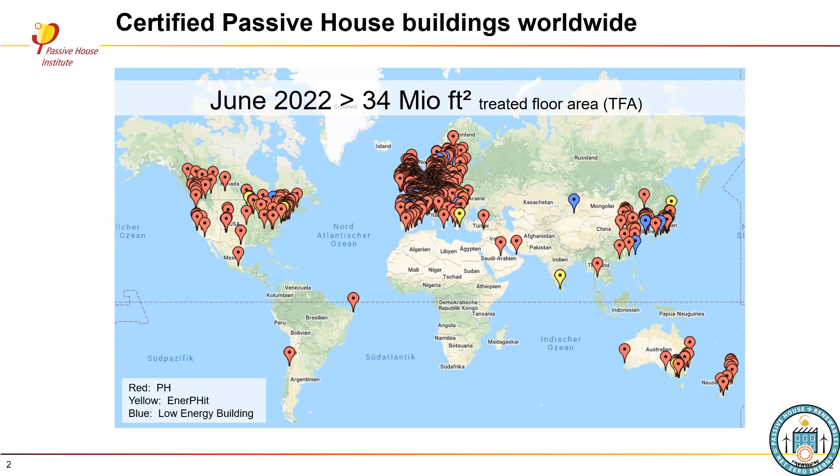But not only multifamily—if I can go to the next slide—they're also doing some office buildings. So it's generally a very positive vibe and uptake of Passive House.

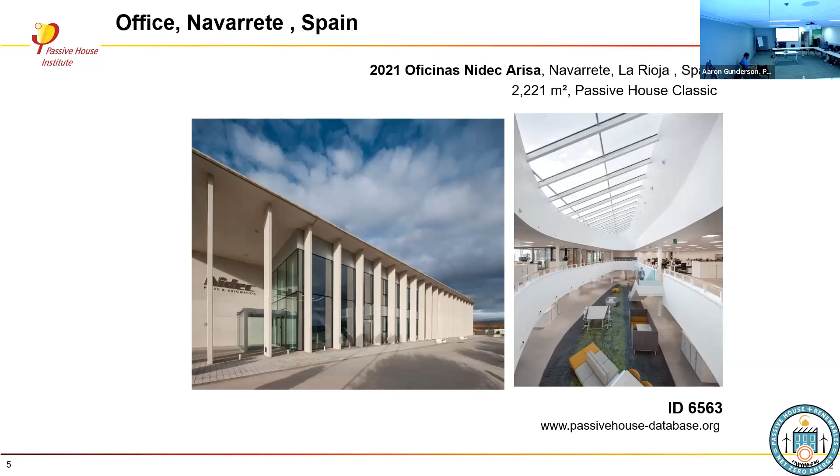As I go through the slides, I've added the link down here. There's an international database where we show Passive House projects, passivehouse-database.org, with the representative ID number. If you want to browse projects worldwide, go to that website and click your way through for inspiration. I've just picked out a few that stood out from fairly recent projects, these are all from 2021 or 2022.

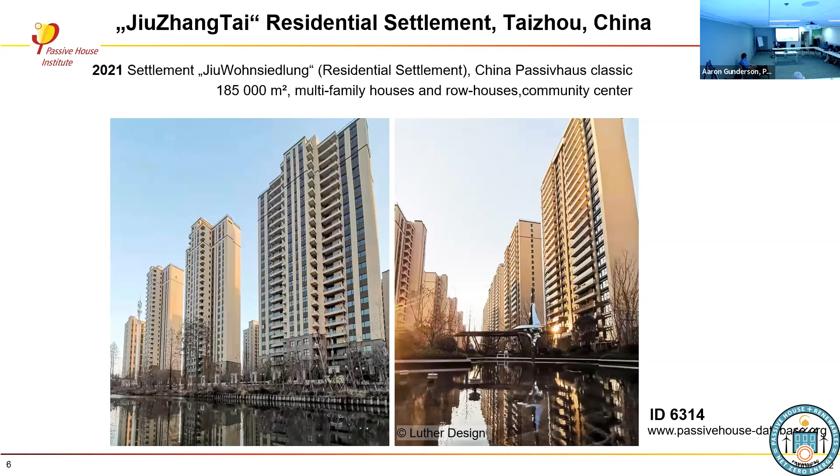This is a quick insight into what's happening on the other side of the world, in China. Passive House in China picked up a few years ago, and as it is in China, things are very big. The Passive House projects being built there are often inside districts, a mix of single family, multifamily, and high rises. These pictures are from a district being built to the Passive House standard in China, which is interesting also because it has many different climate zones—hot and humid conditions, but also very cold conditions depending on where you are in the country.

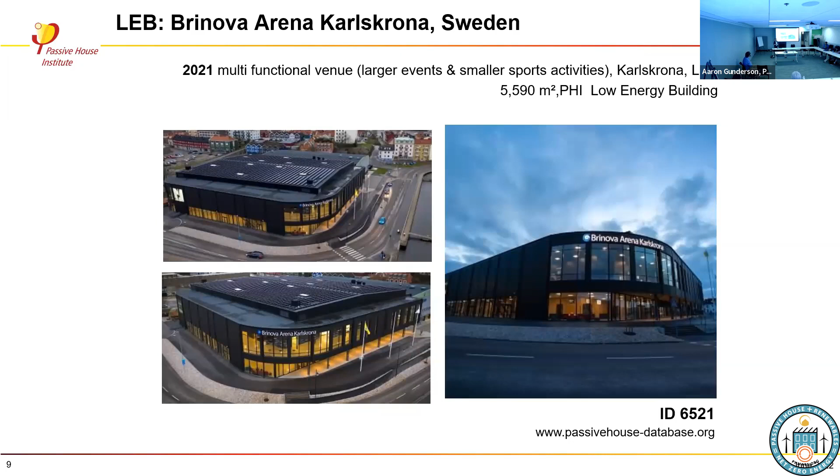This is a project in Sweden, a cold country, and what's interesting is that it's an unusual typology—a mixed-use, multifunctional building with larger events but also small sports activities. This one is not actually a certified passive house, it's a certified low energy building, so it has slightly higher energy performance values but has gone through the same quality assurance process as Passive House.

Another retrofit project, this one is in Spain, in Barcelona, from Micheel Wassouf, who's a very active and long-term passive house designer in Spain. What's special about this is that it's a phased retrofit. It wasn't all done in one go, but over the course of many years. They're taking it phase by phase, and we have a pre-certification retrofit plan, so you have to plan ahead, and you can pre-certify for the retrofit standard.

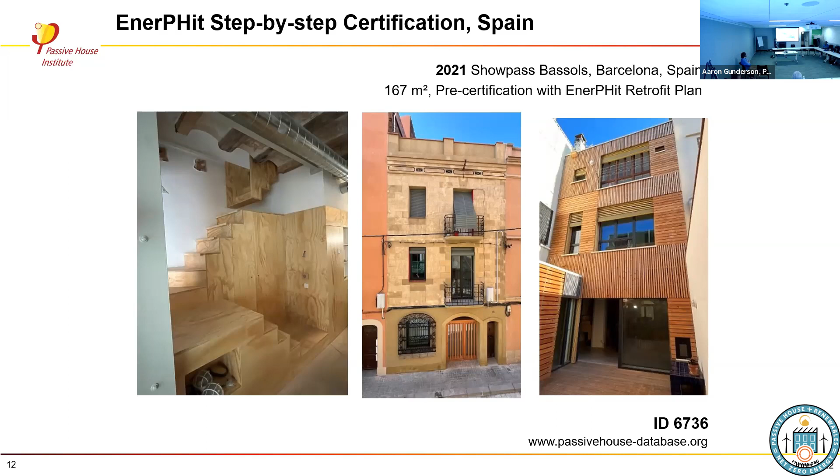Another very special typology is Passive House swimming pools. We started off with research on what does that mean. Obviously for a pool, you don't use the usual metrics, it's kind of the whole house approach. How do I apply energy efficiency for such complex projects?

We started off the research in 2009, 2010. There were two pilot projects in Germany. And then the latest project, which is now open and about to complete certification, is St Sidwell's Point, a leisure centre in Exeter in the UK. It's a great way of seeing how Passive House can be applied as a concept and as a standard for different typologies and complex typologies.

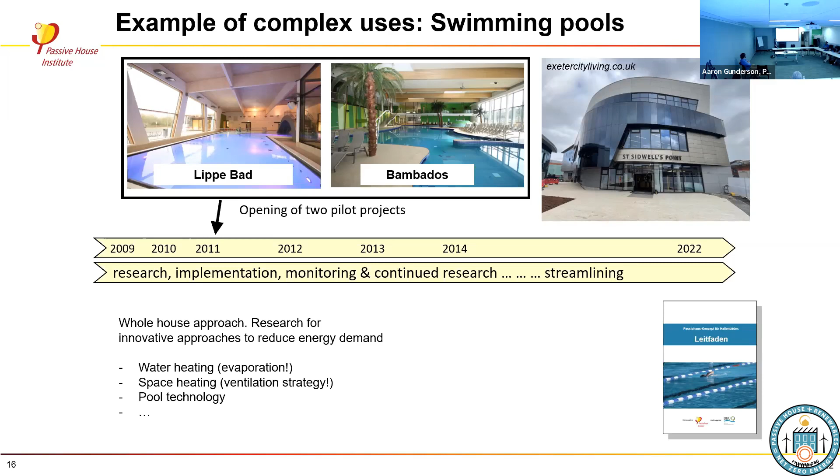So that was just a few pictures and typologies to give you an insight of what's happening around the world. This is similar statistics to what I showed you earlier in terms of where we are in the world. On the right-hand side, you can see the growth of the very first passive house, to where we were at the end of 2021, divided by the different regions. Obviously, the international passive house standard is still largest in terms of square footage in Europe. The next is Asia, with China being extremely dominant, and then there's North America.

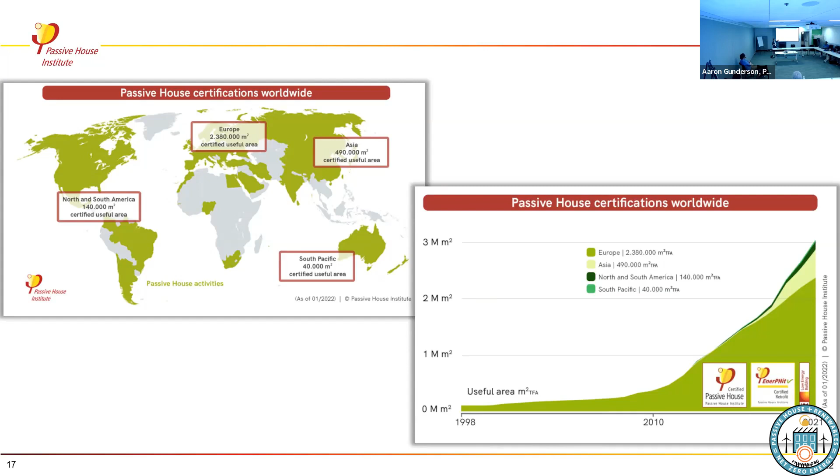Looking at these numbers in North America in comparison, they look quite small. But what's really fascinating is if you keep an eye out on what's happening right now here in North America, that's about to explode pretty drastically. So again, just a few pictures to see where we're heading, but it's certainly growing, and a lot of the projects here in North America are large, quite big in terms of the square footage they're covering.

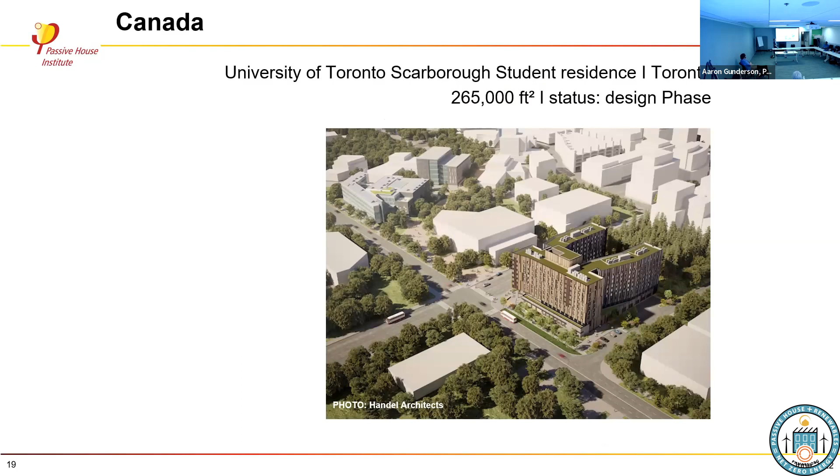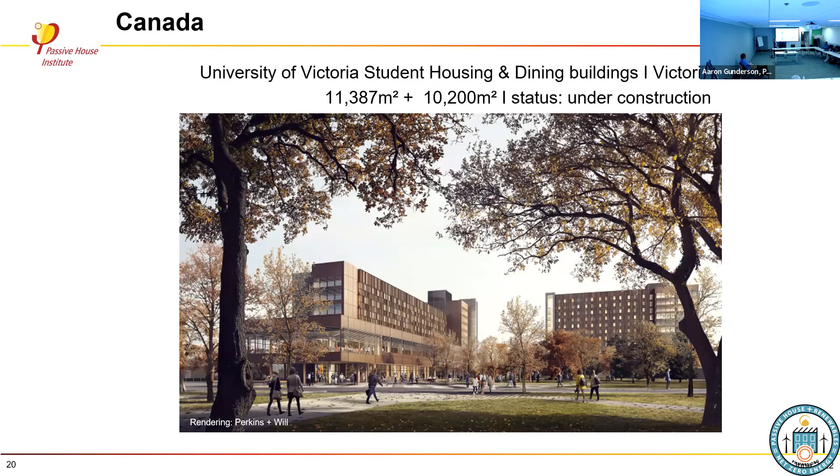So University of Toronto, for example, has a student residence, University of Victoria has student housing with commercial kitchens, which is also a very interesting passive house approach. There's a fire hall in the city of Vancouver undergoing certification. And there's a tower project, the Nelson Tower, also being planned and aiming for certification in Vancouver.

And then obviously here in the US as well, there's quite a lot happening in New York. This is the Sendero Verde project. This small part is about to be certified, and these other sections are also aiming for certification, still under construction. So very exciting to see all of these projects finally actually coming online and showing up in the statistics, being complete and being there as kind of pioneering pilot projects.

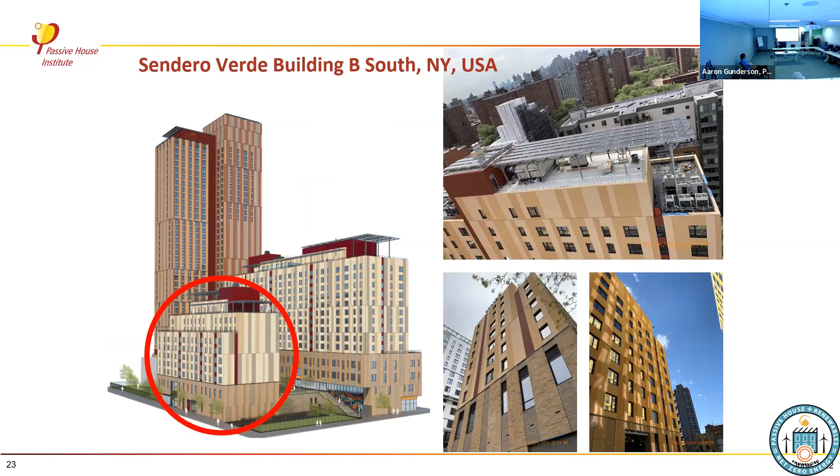And I really hope for that same ripple effect that we have seen in Exeter and so many other pioneering projects.

Another really important one, or interesting one, is the Pirelli building. That's a retrofit, a large-scale retrofit project, also on the radar here in the US, in New Haven, which is being reused, turned into a hotel.

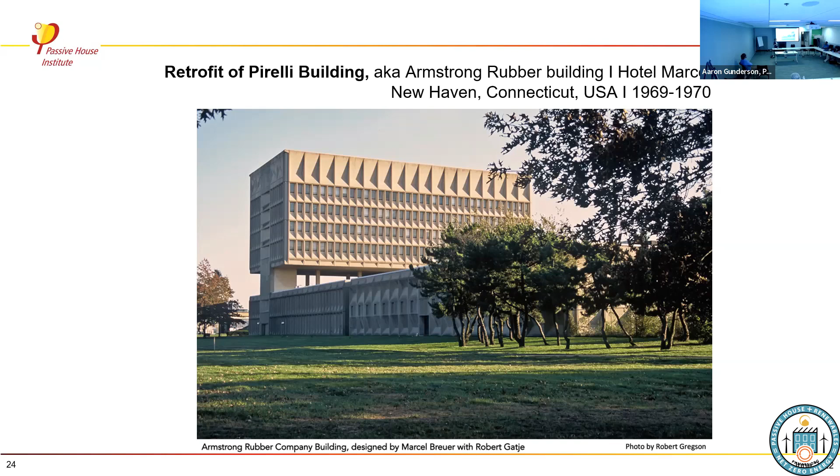And then, of course, here in Boston, the largest project happening right here, right now, is the Winthrop Center, which is also aiming for passive house. It's very special, a pilot project, and it's unique, A, because of its dimension and size, and B, because only part of it, the office part, is being certified. So we're very excited about this coming online as well.

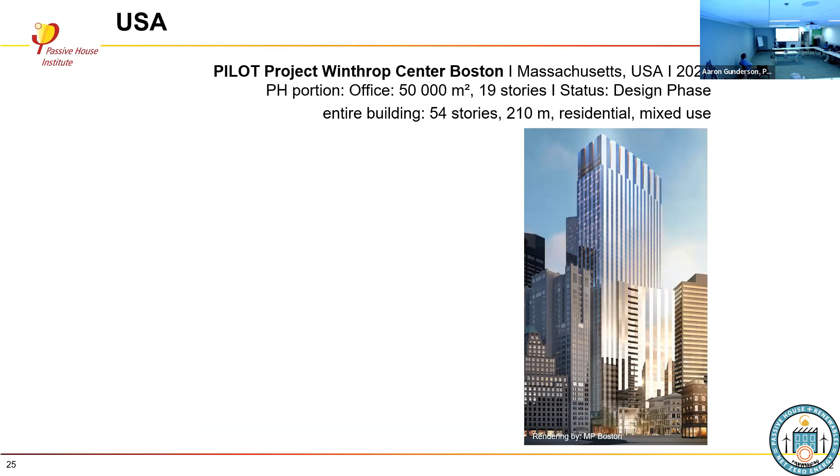Okay, so much for an insight into projects. Now speaking a little bit about PHI, the Passive House Institute, and what we do, what our areas of work are.

So yes, I've come from Germany. We are based in Germany. We have two offices, one in Germany and one in Austria. We were founded originally in 1996, really as a research institute to bridge the gap between research, technical knowledge, and practitioners. So to see where we're trying to get, what is possible from a research perspective, and how do we give that knowledge to practitioners so it gets implemented and actually impacts the way buildings are being built.

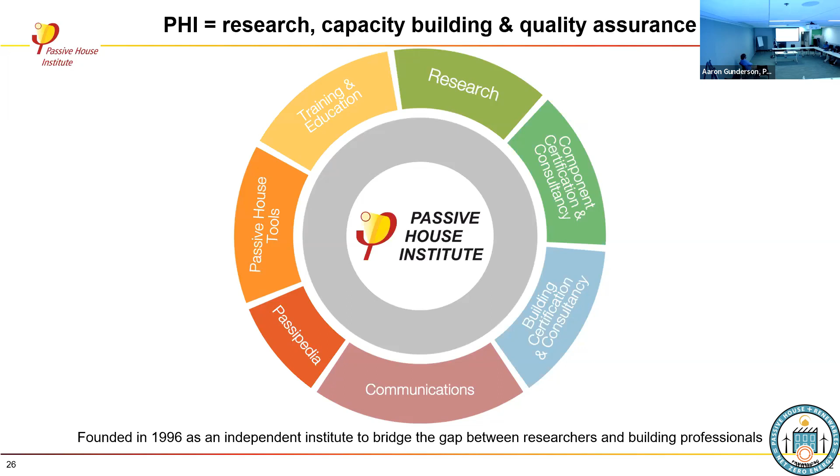So we're all about quality assurance. We're all about safeguarding the standard, defining the standard, and then providing quality measures and support for uptake. That's basically what we do. We're based in Darmstadt, Germany, and we work with partners internationally who help to advocate and spread the passive house knowledge in their specific regions. I'll come to that a little bit later.

So reflecting briefly on the different programs we have, obviously the passive house standard as defined is our guardrail, that's what we're aiming for. By now we have these different programs, so it's not just passive house, passive house - we now have these different levels of certification. In the top row, you see passive house for new builds, where we have Passive House Classic, Passive House Plus, and Passive House Premium, so three different tiers.

Similarly, for the retrofit, we have a separate retrofit standard - I'll explain it in my next slides. And here again we have the different tiers: EnerPHit Classic, EnerPHit Plus, and EnerPHit Premium.

Now, the difference between these different tiers, from Classic to Premium, is that Classic has remained with the passive house baseline, which is focused on energy efficiency. So it's really looking at the fabric performance, achieving your heating and cooling energy targets, but not looking at any kind of energy supply or renewable energy supply. Whereas the Plus and the Premium, you get awarded if you have renewable energy production, whether on-site or off-site, as long as it's new renewable energy production - that gets you Plus, or if you have even more, then it's the Premium standard. The Plus and Premium also have a slightly more stringent overall primary energy target, so it's more ambitious going to Plus and Premium, and we're trying to encourage people to go the extra mile and not only focus on energy efficiency, but also include renewable energy generation.

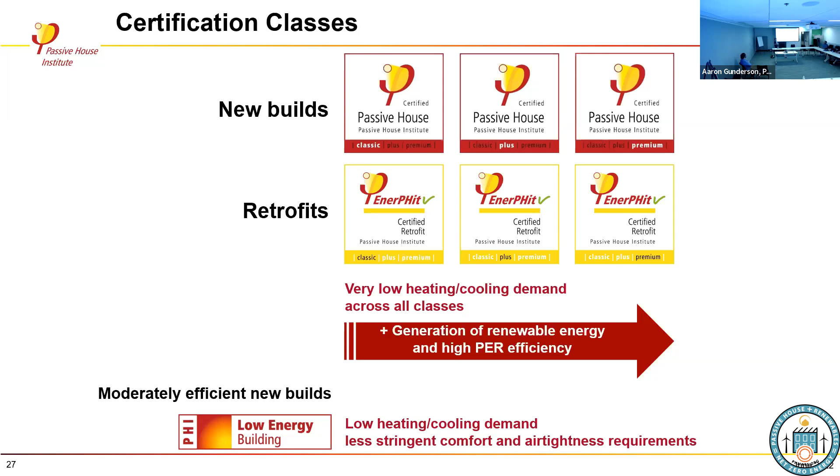And it seems kind of harsh to say it's a complete hit or miss when you're on that 4.75 for your heating. But we wanted to award projects, especially in new places, in challenging climates, with a challenging setting, to still get some kind of award and recognition of having gone through that quality assurance process. So that's why we introduced this PHI Low Energy Building Standard.

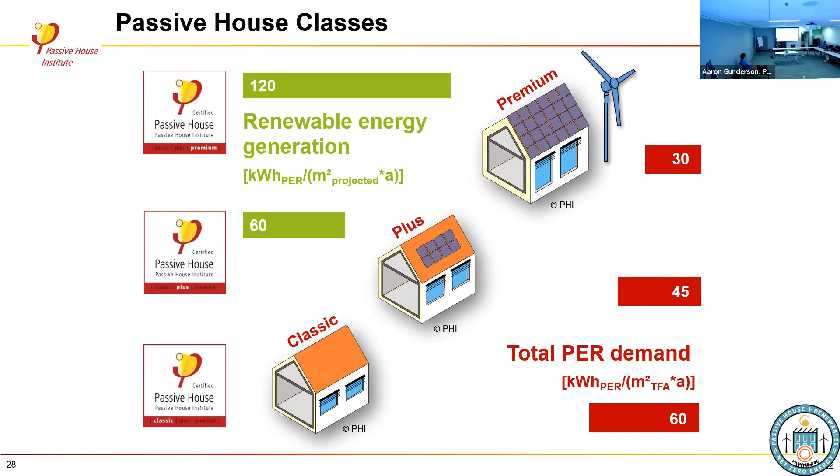We did that deliberately in terms of, it is an alternative, it's a different approach to the net zero, which is commonly referred to or kind of often used by others. And the reason for this, to have the independent rating of energy efficiency and renewable energy supply, is basically...

that we don't want to penalize any kind of commercial, tall, shaded or urban infill projects. So this kind of project in a net zero scenario doesn't stand a chance, just because the space at the top for your PV is so small in comparison to your treated floor area. And that doesn't seem fair. And it guides people to build kind of single-family houses spread out, and that doesn't seem a very sensible design incentive.

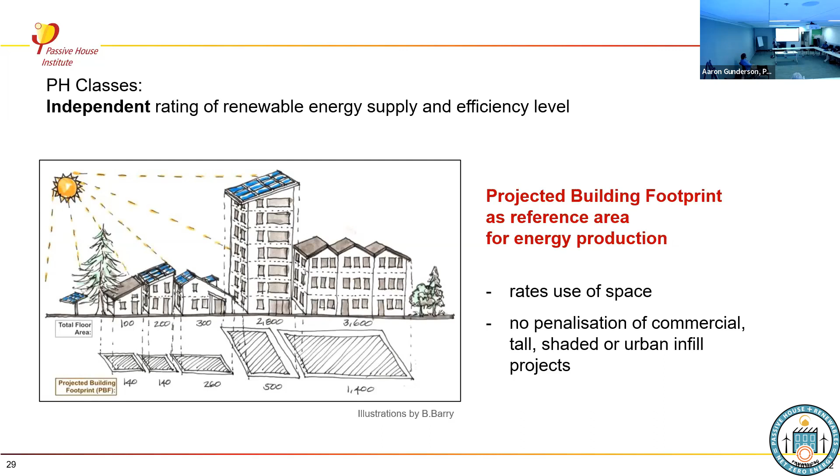So instead of pushing people for net zero, which can be very, very misleading, we have this independent rating of energy supply and energy demand. So we just say, okay, your building occupies a certain amount of space, and it makes sense to use that space as efficiently as possible for renewable energy production. And that's how we rate renewable energy supply. That's why it's per projected footprint. Okay.

Now, in my previous slides, I used the term renewable primary energy, or PER, quite a lot without actually explaining it. This is also something that is very specific to the International Passive House Standard. We introduced it in 2015 for the first time, when we introduced the different passive house classes. And we introduced it as a different metric and alternative to the standard source energy approach.

Just because we are in the position worldwide, the energy supply is transitioning towards renewable energy infrastructure, towards electrification. And what we need to be addressing as a building industry is to make sure that buildings are designed in a way that they will work and they support that renewable energy infrastructure. Now, the difference with renewable energies is that they're not available at all times, right? It's only when the sun shines, or when we have wind, or when we have hydropower. So it's really important to look at those aspects of load matching.

So what we did basically for the PER concept, it considers your building in the context of a scenario of 100% renewable energy supply. And then we have conversion factors to see, okay, how much renewable energy do I have to feed into the grid in order to be able to cover my site energy, the actual building energy demand. And that loss factor, that conversion factor, takes into account the load mismatch. So it takes into account how much losses do I have along the way because of storage, because of seasonal storage. And that can be quite significant.

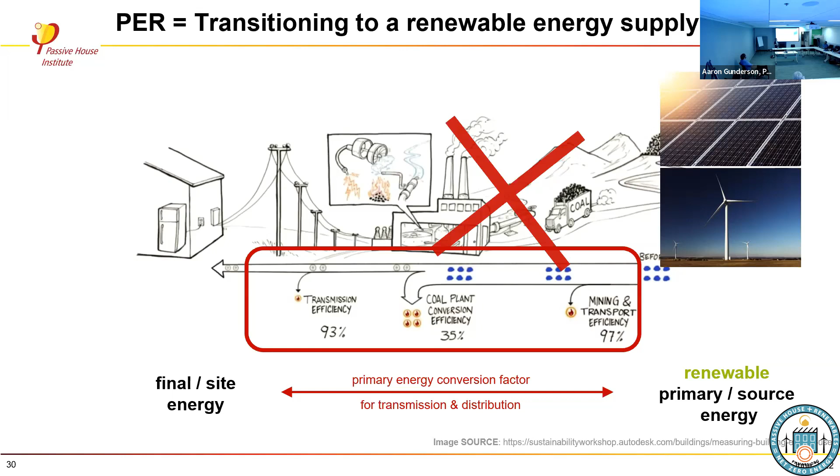It's a big topic, PER, which I can't dive into in detail right now. I'm happy to talk about it later, or point you toward resources to read more. It's important to me since it's one of my research topics, but we've also seen really interesting feedback from the passive house community and from policy makers looking for these kinds of design incentives. What does it mean to have buildings in the context of renewables?

Basically, it's a climate-specific decarbonization metric based on efficient use of regional renewable energy resources. If you apply it to your design, it strongly incentivizes electrification instead of using fossil fuels. So with passive house planning, you'll get a better PER factor with a heat pump electrical solution than with a gas boiler, which is the direction we're all trying to push toward.

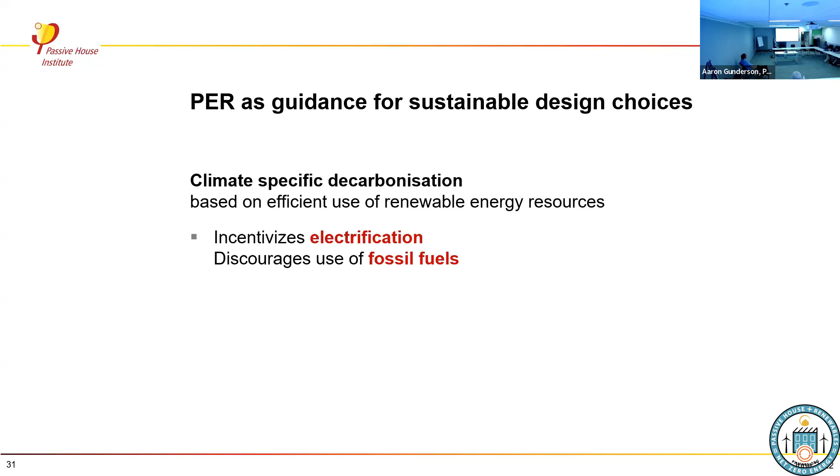It also means it aligns energy demand with renewable energy supply. The difference for heating and cooling matters—it's much more important that we reduce energy demand for heating than for cooling, and that's what the PER concept picks up on.

Last but not least, we have a budgeted approach to biomass. It's not so relevant here in North America, but it's a topic in many parts of Europe, where projects get rated as very green and sustainable just because they have a wood burner, even if the building itself is inefficient—that's not a long-term sustainable solution. So we have a budgeted approach: some biomass is fine, but not to heat an inefficient building.

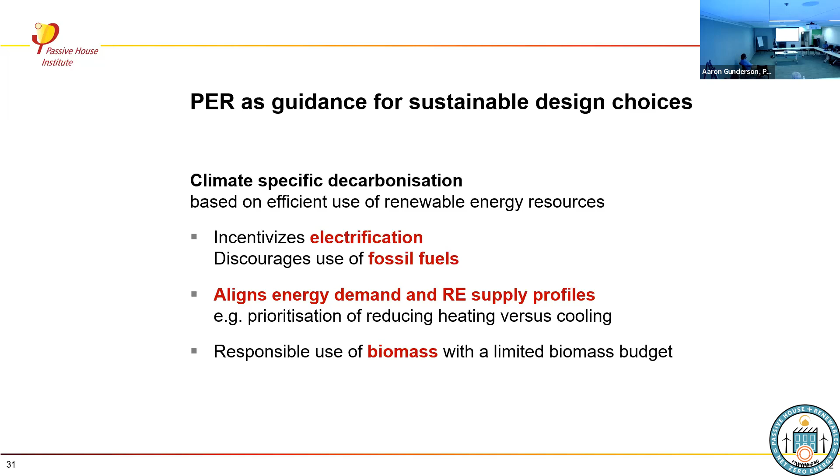So that was a quick run-through of PER. I do want to speak a bit more about our retrofit standard, EnerPHit, because that's just starting to pick up here in North America, though I don't think there's much activity yet here in Massachusetts.

It's called the EnerPHit standard. It's a retrofit standard where the idea is you apply the same concept—implementing passive house components—to an existing building. There are two pathways to achieving EnerPHit certification. One is the component pathway, where you have to meet specific minimum requirements for components like insulation, windows, and airtightness.

Pathway two has specific energy demand limits, and those limits are higher than for a passive house, recognizing that with an existing building it can be more difficult—you have thermal bridges, especially in the ground area, that you can't fully resolve like in new construction, plus orientation constraints and so on. So the threshold is slightly higher.

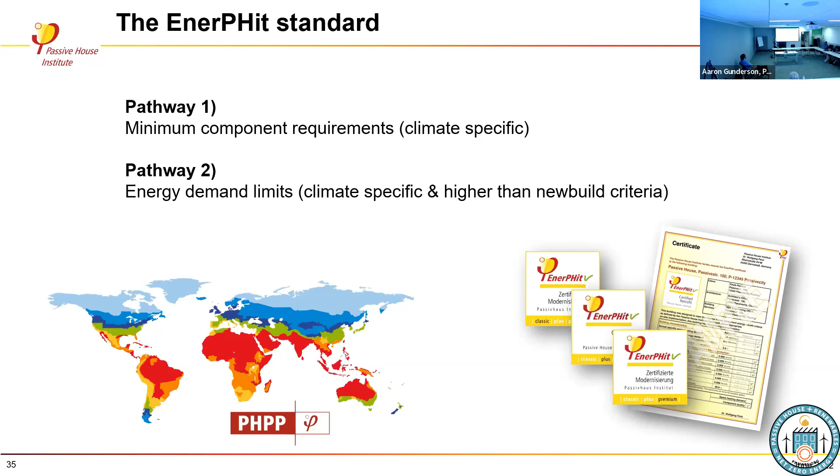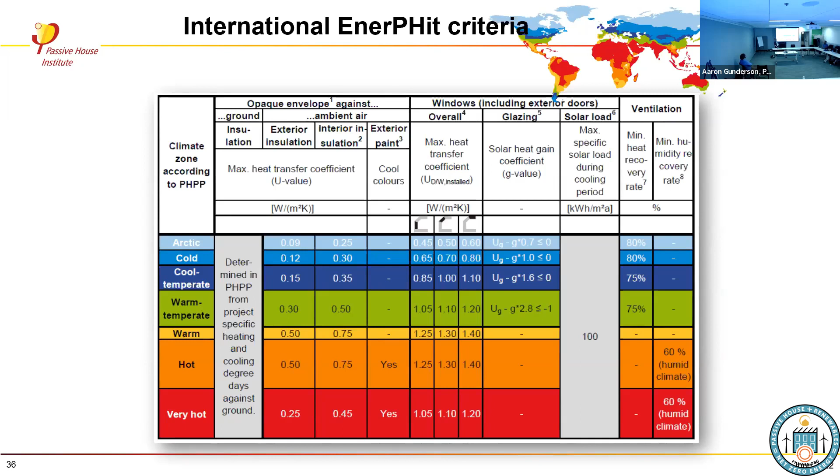Both pathways are differentiated depending on where you are in the world—they're climate specific, with slightly different targets for different climate regions. This slide uses SI units just to give you an idea; the actual numbers can be looked up on our website. Basically, we define the U-values or R-values for windows and walls, and the efficiency of heat recovery requirements for different climate zones, whether you go the component pathway or the energy demand pathway, with different targets. Cool temperate is what we typically have in Germany.

For passive house, it's 15 kilowatt hours per square meter per year. And for EnerPHit, it's 25 kilowatt hours per square meter per year. So not quite double, but it is a bit higher.

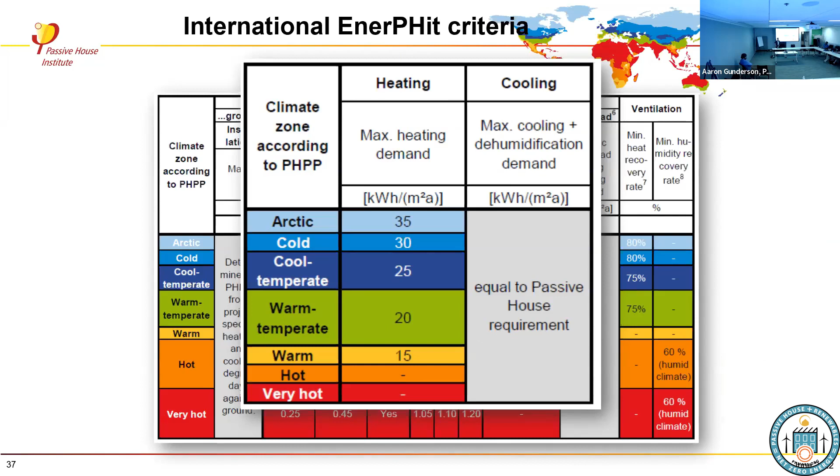Retrofit is something we're really trying to promote and push more, because it's important. We now have one additional scheme to address projects that can't do a full retrofit all at once, but need a phased approach—maybe you only replace the windows because they need replacing, but don't have the means to address insulation at the same time, or vice versa: maybe your windows are still in good condition, so you do the insulation first and leave the windows.

So that phased approach - now the difficulty with those phased approaches, and what often happens, is that we create a so-called lock-in effect, because people will look at the wall insulation without thinking ahead in terms of what does that mean if I replace my windows later on, without looking at the details beforehand.

So what we offer is the so-called EnerPHit retrofit plan, which is an extra tool that aids you in documenting what is my timeline for my different components, and what do I have to keep in mind. If I do my walls first, what does that mean in terms of connection details, or the other way around.

So we offer this retrofit plan, and you can get pre-certification. If you've set out this entire plan and implemented the first step, you can submit that to PHI or to an accredited certifier, and get pre-certification to acknowledge that you're on the right track towards achieving EnerPHit certification in the end.

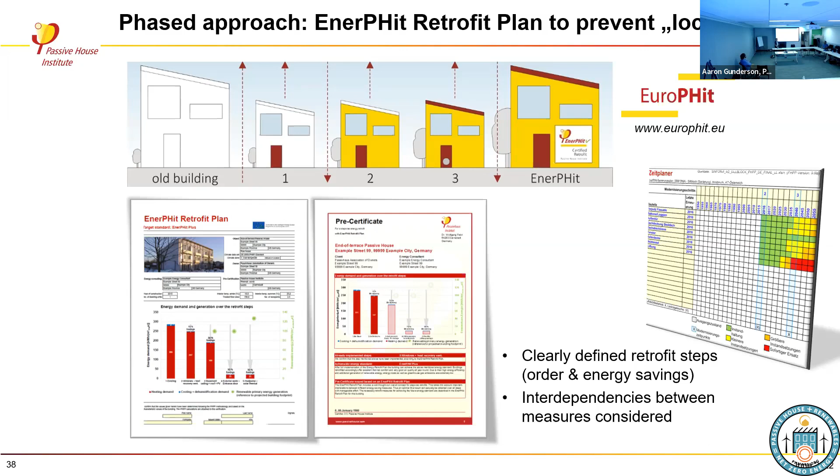And I'm personally really excited that this is starting to pick up. It was really difficult to get this rolled out, but it is starting to pick up, especially in Austria. So this is really, really exciting. It's worth looking this up again.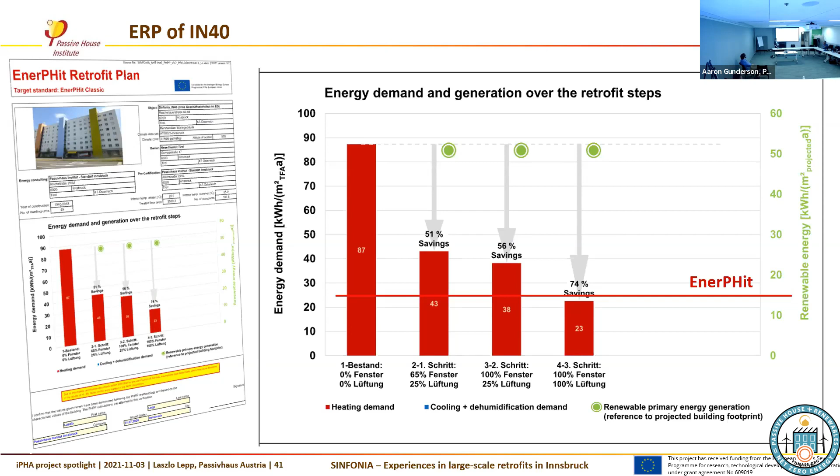Just some pictures to show that this is reality and not just on paper. This is what the project looked like beforehand, what it looks like afterwards.

They have some really interesting details here in terms of how they dealt with the balconies. On the other side of the building is full of balconies, so it's really interesting to look at that thermal bridge details.

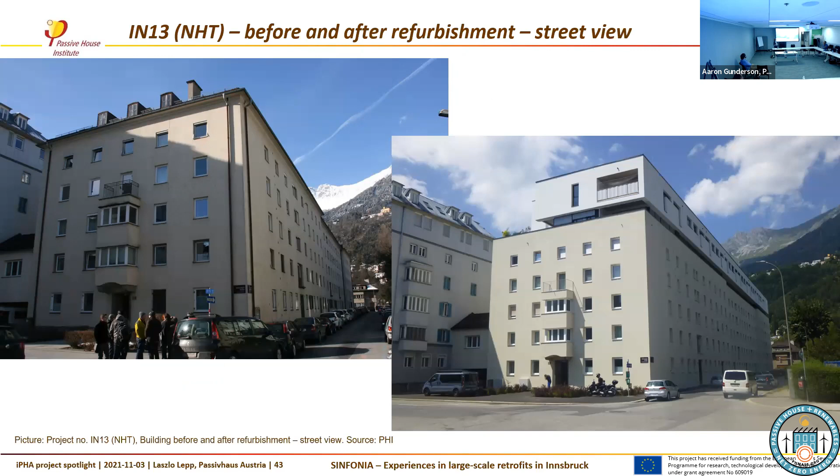Here are some details of how they dealt with the ventilation. Most of these projects also retrofitted while the people were still living in them, so they had to find a way to do this with as little disruption as possible.

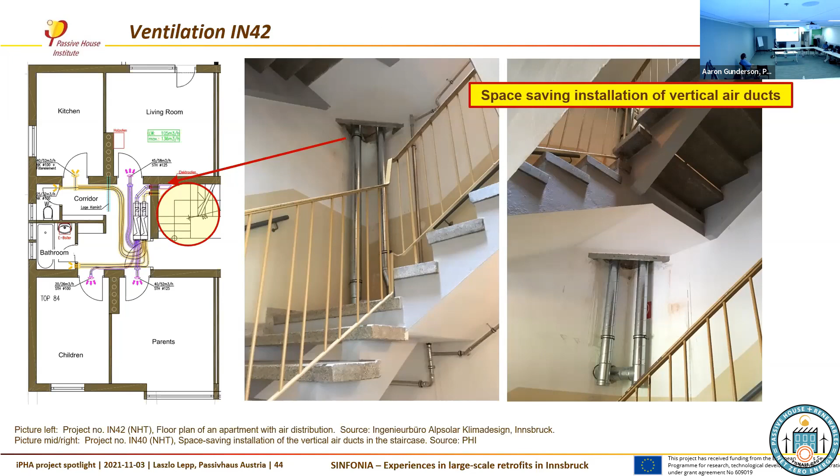Again, here, this is the ventilation within the apartments themselves, so installing the ventilation system in the hall, and they did it pretty quickly. So it was important to the developer, in this case, to have smooth implementation.

So just a brief insight into this. If you'd like to learn more about it, I'm happy to point you in the direction of the resources. The webinar should be going online also, at least for members - these kind of webinars are available to access and to rewatch.

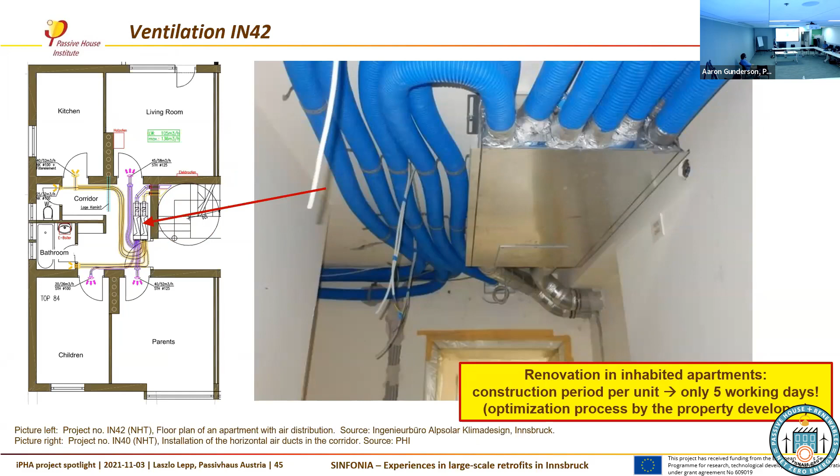On another topic of retrofit, this is something that is ongoing at PHI - some of our current research work. It's called the outPHit project. A lot of our research work happens or is enabled through funding from the European Union. This is one of those projects, outPHit, where we as Passive House Institute have the lead, and we work with partners in different countries of the EU to further the research and implement this in pilot projects.

And the goal of this outPHit is really exciting, really up to date and really important. It's about lowering the barriers of uptake of really high energy efficiency solutions for retrofit - essentially one-stop shop solutions, prefabrication, and being able to distribute that on a larger scale, with the aim of being able to implement the EnerPHit standard on a large scale. That's the goal of outPHit.

We're still in the middle of the project. Some case studies were presented in the virtual part of the conference last Friday, so some of you might have seen it.

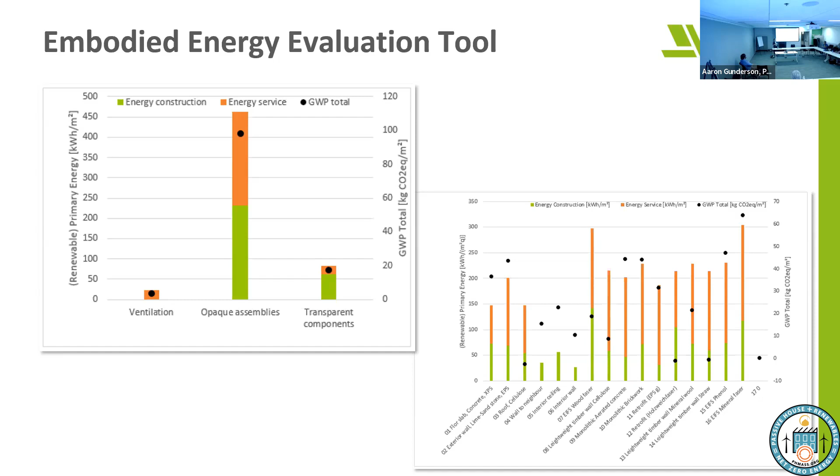It's quite interesting to go into the results, because it does show that it's worth investing in extra insulation compared to the operational energy savings over the lifetime of the building, especially for retrofit. It really does make sense. And it's quite interesting to see the comparison of different materials - not always intuitive, so very, very interesting.

Okay, so for the last section of my presentation, if I still have a moment, Aaron - is that okay? I wanted to touch a little bit on those three focus areas.

It's basically the design tools that we need, the people and the expertise, and the components and their quality. Those are really the three main ingredients that we as a Passive House community need to be working on, pushing, distributing, and making available in order to make sure that passive houses being built reliably achieve high performance.

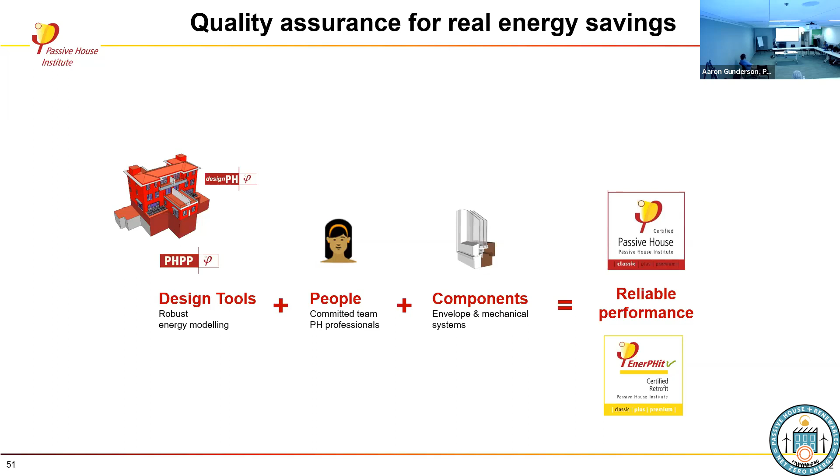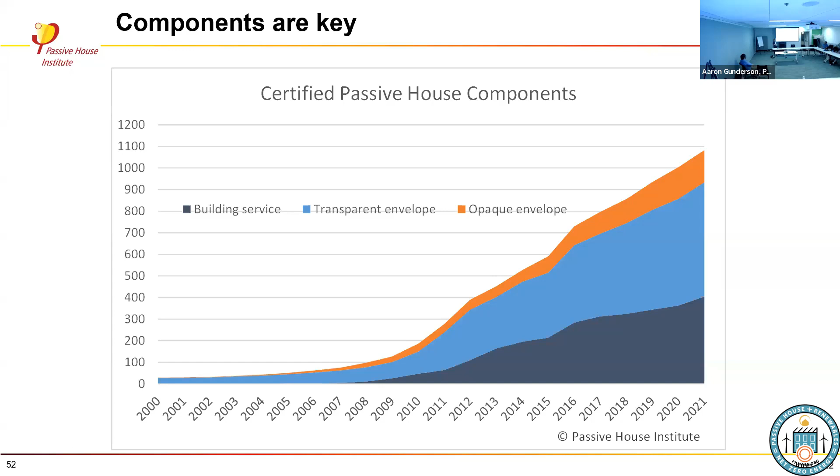So I just briefly want to speak about these three categories. Passive House components - we from the Passive House Institute run a certification scheme. We work with manufacturers, help them optimize products, or if they already have good products, we offer certification. Here you see the growth of Passive House component certification over the years. There are different categories for building services, transparent building envelope, or opaque envelope - building systems basically with the details already included.

There's a search function, which makes it easier if you're looking for a specific product, for example. You can sort by country and availability - you can check if a product is available in the US or not. And new, what we started implementing is export to the PHPP. So if you click on a window, you can click a button and get those specifications integrated into your current PHPP energy model. At the moment this is for transparent building envelopes, but we'll implement it for other components step by step.

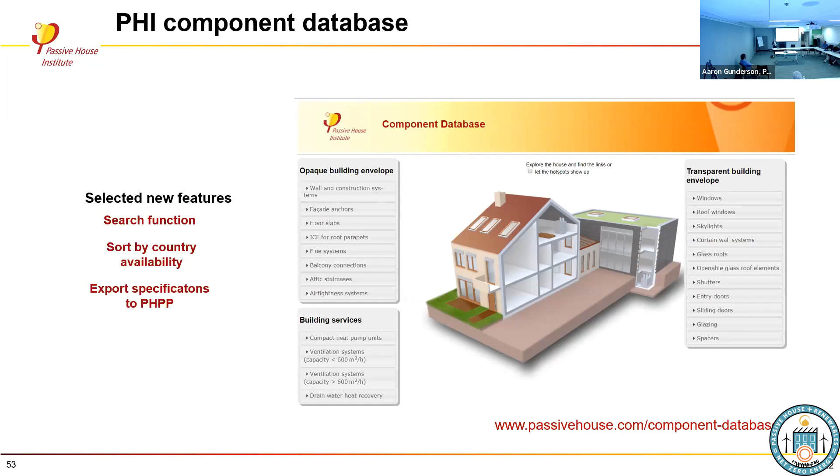What I don't have a slide for, but what's important to note, is that we're trying to push more for certification of heat pump systems. We have a certification scheme for split units for heat pump systems, so we're trying to support that market uptake. It's a really difficult one to assess the efficiency of such systems, but we're happy to work with manufacturers and really want to move that forward.

Then the people - all of you and beyond. Passive House training is super, super important for spreading the knowledge and driving change. We need to make sure people know what it's all about and how it works in order to implement it.

We're celebrating an anniversary this year - 15 years of the Passive House Designer certification, and 10 years of the Certified Passive House Tradesperson certification. So those are the two main tiers that we have, for designers and consultants, and for tradespeople.

I'll say a bit more about those programs in a little bit. There's another level of expertise which is really important, and that's the Passive House certifier.

People who are really experienced can go through the certification training with us at Passive House Institute, PHI. They can become accredited certifiers and then certify passive houses to the Passive House standard in their region. That really helps us grow Passive House internationally, so projects don't have to come all the way back to us in Germany for that quality check, but can go through accredited individuals in different countries. So that's really helping us grow the movement.

Here in North America, there are around 13 certified organizations, active people, and over 25 individuals. They come together as a group called the North American Certifiers Circle. Passive House Network is also doing some really good work to inform the Passive House community here in North America about what certification is all about, why it's important, and how you can approach a certifier. So that's worthwhile looking out for if you have questions about PHI certification protocols.

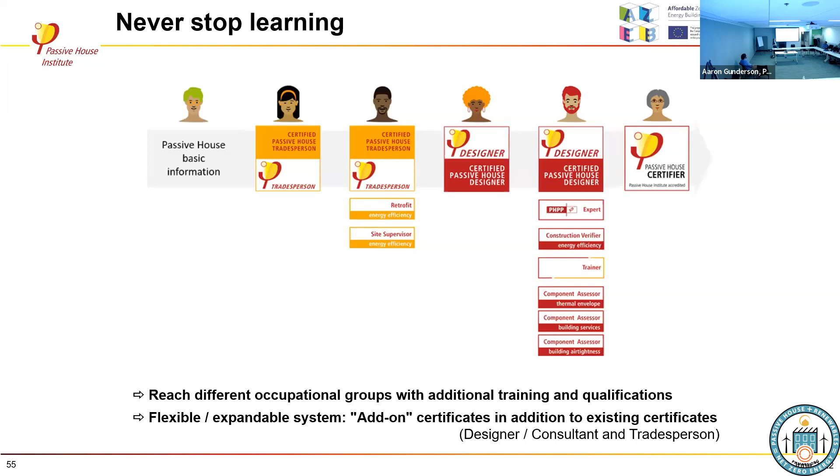Now the tools, a really, really important part of Passive House. We wouldn't be able to achieve Passive House without these verification methods. PHPP has been part of Passive House from the very beginning. It's our energy balance model, what we use to optimize the design, and it's the core of Passive House certification, really verifying where my energy performance is at. We've just released Passive House PHPP version 10 in English last month.

We're setting up contracts with resellers so you can access it here in North America. Not quite ready yet, but soon, just a little more patience. It is available in English, so you'll be able to access it soon, and I'll give you an overview of updates in a second. Next step is to translate it into the IP version, and that'll be within this year. I don't know how many of you work with SI, but if you do, you'll be accessing it sooner. If you want to wait for the IP version, that's a few more months to wait, but we're on it.

So what's new in PHPP 10? I'm only going to briefly run through this, and then I have a workshop on Thursday where we're running into a bit more detail on these different features and what is new within PHPP 10.

There's a few new features, worksheets, and tools. The core of the PHPP in terms of how we calculate heating and cooling hasn't changed. That's the same, that's worked, that didn't need an update. So it's really about adding new features to the tool.

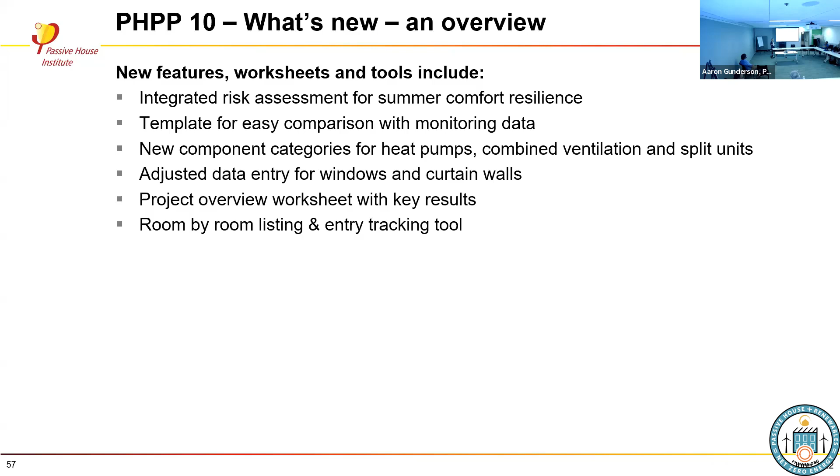And then there's some supplementary tools like a room-by-room schedule where you can easily keep track of the different rooms and different room ventilation rates. So those are the main new features, and then there are a lot of small changes and additions within the different PHPP worksheets.

For you guys, it's not such a big deal. For people in Australia and New Zealand, this is huge. PHPP 10 is going to make a huge difference because it now also works fluently on the Southern Hemisphere. Beforehand, you had to switch the climate data and pretend it was on the Northern Hemisphere. So that's a big change for many people down under.

I don't know how many of you are familiar with the variant calculation. There's a variant worksheet in PHPP which lets you look at different variants of the same building at the same time. We've extended that to include PV and solar thermal.

In terms of hot water systems, we've added some new features for heat interface units - I never know whether that's the right terminology in English. Basically, you have the same heat distribution as the heating system, and then you have the heat exchanger in the flat for your hot water system. So it's a different way of modeling your distribution losses.

Another change, which doesn't affect the PHPP itself but does affect user-friendliness: instead of having a printed manual, you can access it online as a flip book, which makes it searchable, digital, and a lot easier to use.

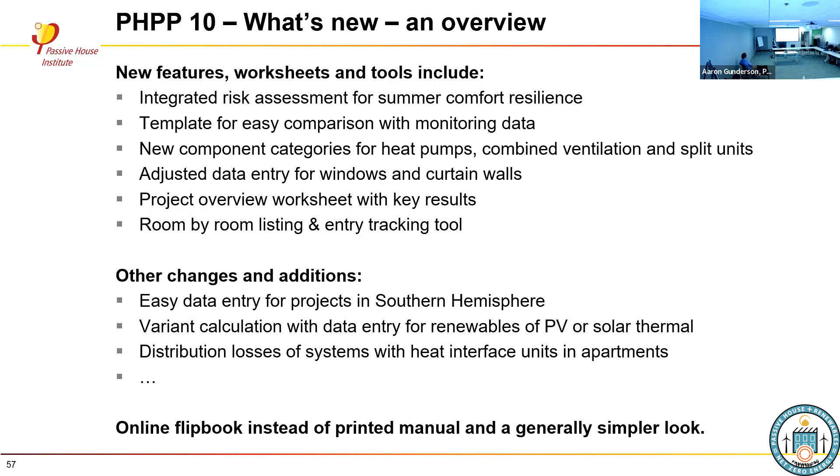DesignPH has been updated. If you're already working with version 2, you've got access to the updated version 2.1.10, which is compatible with PHPP 10. That was the main update there.

For those of you who don't know DesignPH yet, it's basically a plugin for SketchUp which allows you to do a quick and easy energy balance within your 3D model to get an idea of where your design stands, and then you can export all the information into PHPP for further refining the model.

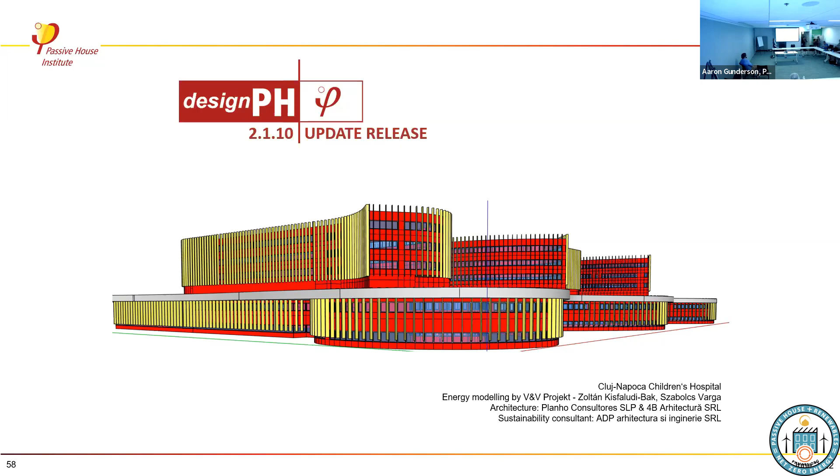With new PHPP also comes the update of the Passive House criteria document, which was just released in May 2022. The Passive House standard itself hasn't changed, but it's been a while since the last release, and a lot has happened with Passive House growing - different typologies have emerged. A lot has become standard practice but hadn't yet been formally written into the criteria, so that's now been integrated.

Just a brief overview of the changes. There are some changes to the energy demand and load criteria in terms of simplification. We've taken out the criteria for cooling load because it wasn't really helpful for design choices.

What's really interesting and important is the project-specific primary energy demand for densely occupied buildings - especially relevant for densely occupied multifamily buildings with a lot of people and electric equipment in small spaces, where the standard primary energy criteria is really difficult to reach. We've developed a tool, now integrated into the PHPP and the criteria, so you automatically get an allowance or bespoke criteria for that specific project.

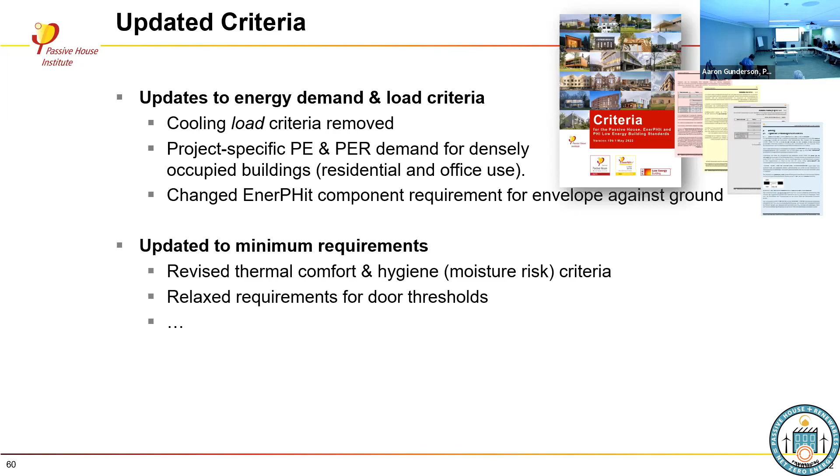There are some details that have changed in the criteria regarding comfort and hygiene requirements, which are now specific to the project and to the climate. We've also relaxed requirements for door thresholds, just to make it easier and remove one of the barriers that's often been a problem in implementation.

And then just some clarifications on the boundary conditions and the documentation required. We've restructured it a little bit, and we hope we've made it easier to access the information and flick through that catalog of requirements for Passive House.

Is it available now? Yes. Online? The criteria is available online on the PHI website. Is this summary available there as well? No, but the criteria document does include, in the front section, a summary of changes - not the exact same wording, but it's there.

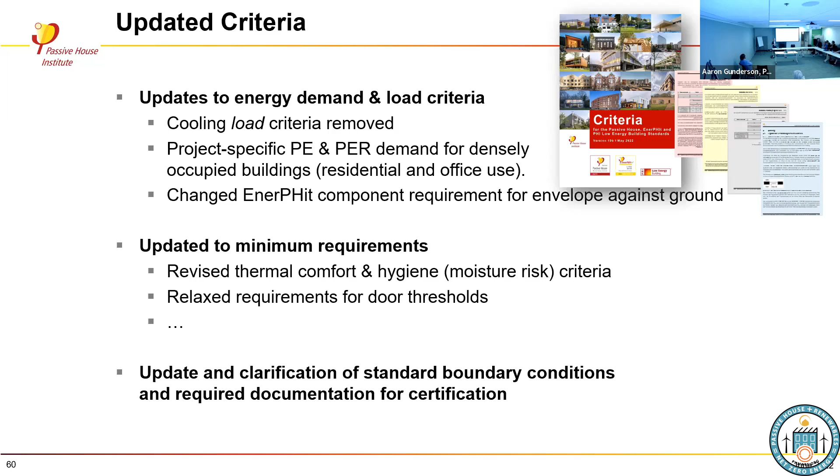The rule, as always with Passive House, is you can finish a project with the criteria version you started with. But new projects coming online now need to work with PHPP 10 and the updated criteria. And as of this iteration, we'll be updating the criteria on a regular, annual basis, making sure all the new additions and refinements are available to everybody and written into the criteria.

So I'm coming towards the end - just a final thought. We're based in Germany, but there's so much happening around the world, it's impossible to keep track of it all. It's really all of you making this happen in your specific region. We all work with a global aim, a global standard, a global idea, but it's really important to act within your local context.

Thank you for your time. I'm happy to take questions. I hope I was able to give you an insight into what's happening at PHI, and I look forward to today and the rest of the week of Passive House here in Boston. And we do have time for questions - what's happening?